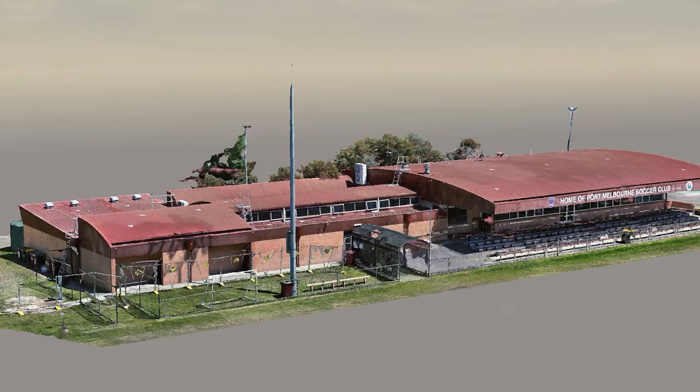The software we'll be using today is a free version of iTwin Capture Desktop Viewer.

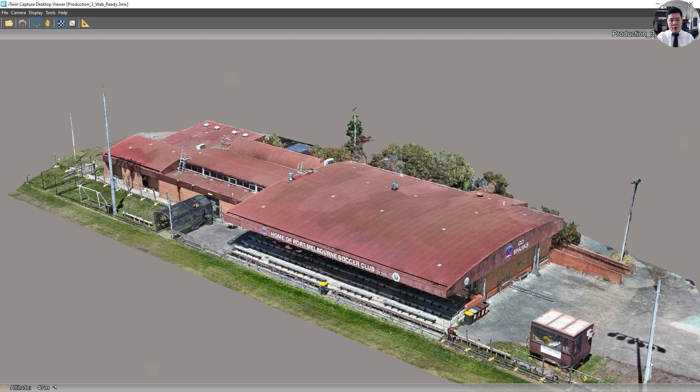Let's have a look at this 3D mesh. As we see, this is a 3D mesh of a soccer club. What we want to make sure for a 3D mesh that we're going to upload onto Reality Data Viewer is that there isn't any major artifact within this 3D mesh, and also in areas that we are interested in inspecting.

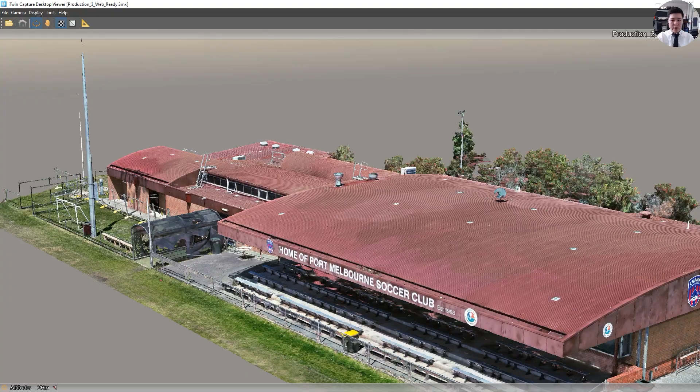Because when we move on to Reality Data Viewer, we will see that there is an application where you can put down a point of interest and inspect the actual photo within that point of interest. As we see here, there is nothing going on with this particular structure, no major defects. So we're going to go ahead and move on to iTwin Capture Modeler.

Like we have inspected on the free version of the desktop viewer, there isn't any major artifact or fault with this particular 3D mesh. So in order to prepare for an upload, we're going to submit a new production. For the purpose and name, leave everything at default.

On the format and option, click iTwin Ready, and make sure that generate level of detail across tiles is on. For the spatial reference system, make sure it is correct because this will match up the 3D mesh with the background map. Next, we choose a destination, and as a formality, name it in any naming convention that you or your organization prefer. And then we'll click Submit.

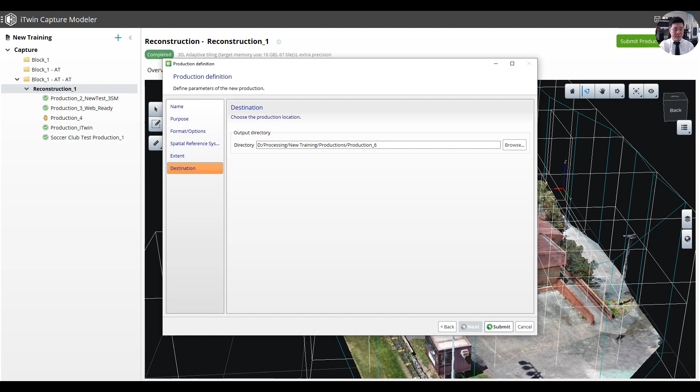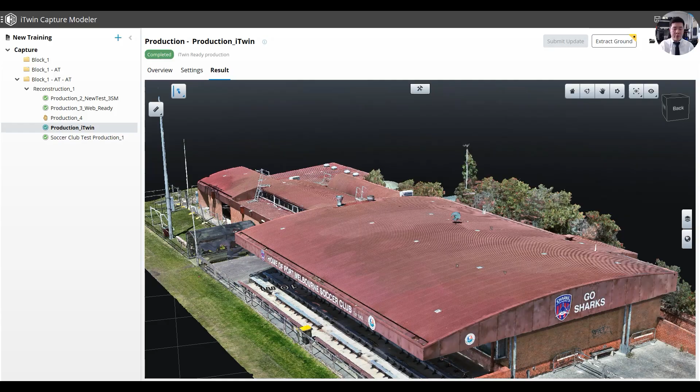And here we have a complete production of the iTwin. We can inspect the results here. You can repeat the previous inspection that we have done in the desktop viewer. Make sure there aren't any major floating artifacts, and make sure there isn't any major defect with this particular 3D mesh. Back in iTwin Capture Modeler, we want to navigate to the iTwin production.

We're going to click the Share button on the top right corner. Here you will see a window, Share on Reality Management Portal. Here you want to associate this particular production with an iTwin. Once you have associated it with the iTwin project, go ahead and click Upload Data. This will take a significant amount of time, so be prepared to wait.

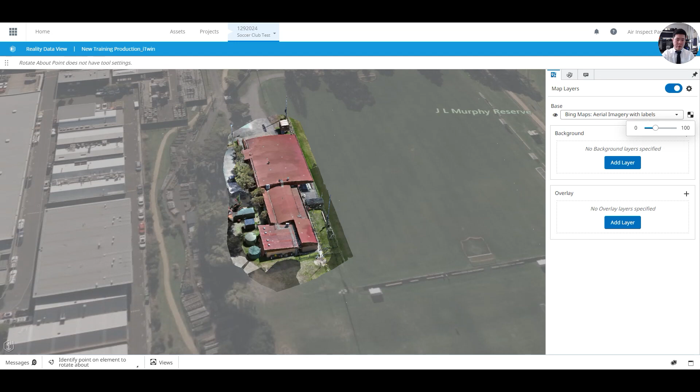Now we can see a file called Cesium 3D Tiles, which we can open in Reality Viewer. So let's go ahead and click it. Here we are in the Reality Data Viewer. Here you can see the 3D mesh as well as the background map layer. Let's pull out the side panel. You have the option to make the background map more transparent, or alternatively, you can turn it off. In this case, we will turn it off.

Now let's engage with one of the major functions within Reality Data Viewer, and that is the photo navigation. To do so, we'll go to the Reality Data tab, click on Photo Navigation, and make the image set visible. Here we'll see the panel for the image set.

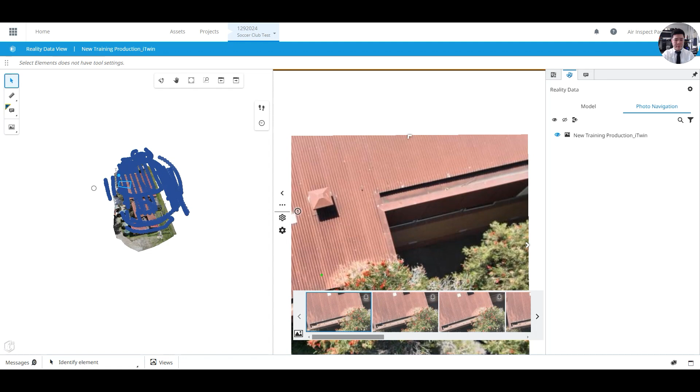Let's zoom in. To engage with the photo navigation function, go ahead and select a point of interest. Here we have selected a point of interest on the ladder. Here we can see all the images that were taken of this ladder in this entire project.